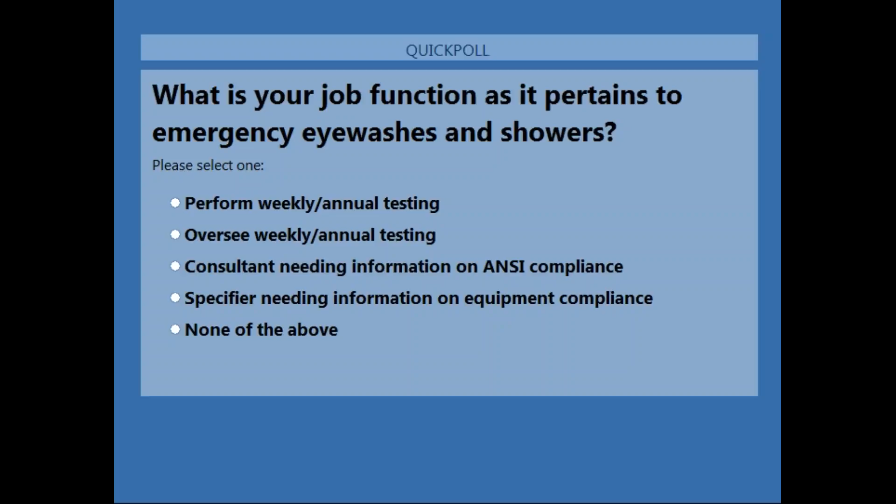Okay, thank you, Samantha. So what we're going to talk about here is the importance of providing the proper equipment. And prevention is what we're going to talk about here. And we always like to start with why. Why do we provide equipment? And when we talk about prevention, it's not really prevention of the accident. Obviously, our equipment is used post-accident.

What we're talking about is the prevention of further injury or even fatality post-accident, overall general workplace risk, lost time, money, both for the individual and the company. OSHA has stepped up enforcement, particularly for employers who have a history of serious or repeated violations. And obviously the goal for Haws and everyone out there, I'm sure, is to go home safe every day.

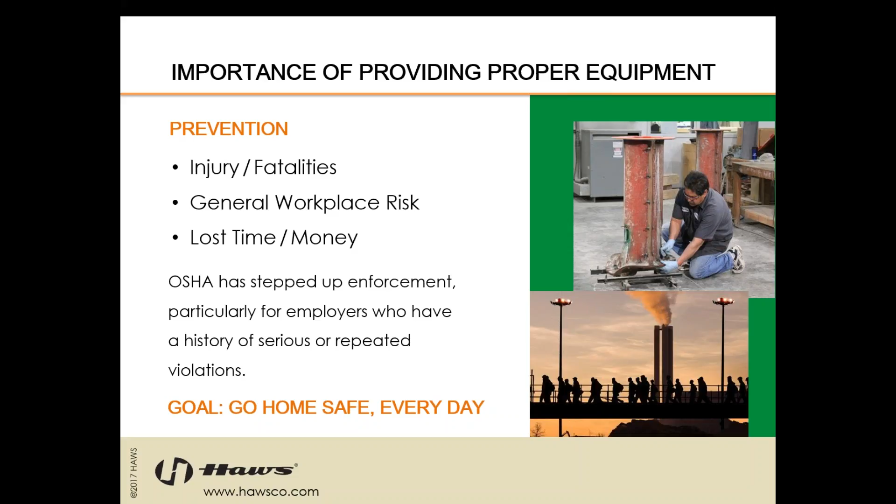OSHA, or the Occupational Safety and Health Administration, states in 29 CFR 1910.151 the requirement that where the eyes or body of any person may be exposed to injurious corrosive materials, suitable facilities for quick drenching or flushing of the eyes and body shall be provided within the work area for immediate emergency use. Now this is the OSHA statement when you look up your requirements for your emergency drench equipment.

In addition to that, some states require emergency eye wash and shower equipment in workplaces where irritants or chemicals are toxic by absorption. And that's stated in the ISEA Emergency Eye Wash and Shower Equipment Selection, Installation, and Use Guide. So it's important that you look at your local requirements by your state.

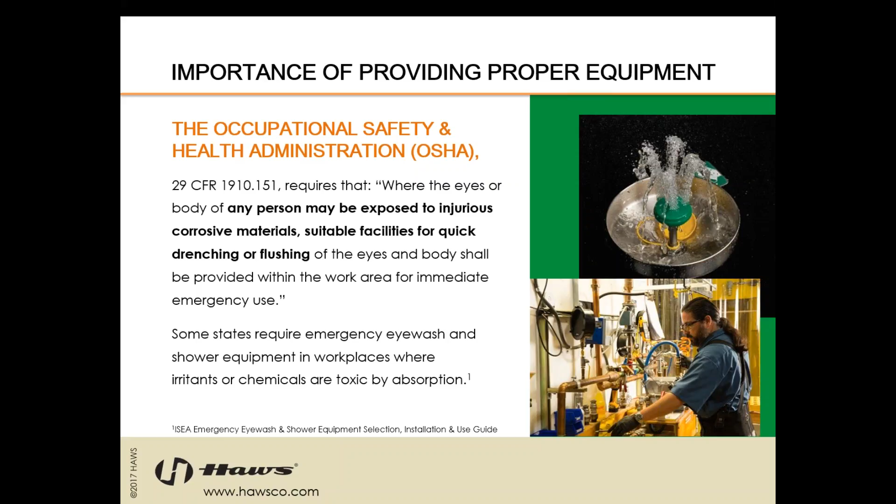So what's really interesting here is, as you can tell, OSHA is very vague as to what defines a suitable facility or corrosive materials. So for definitions and specifics, they recommend following the ANSI standard. Good point. Thank you, Samantha.

The American National Standards Institute, also known as ANSI, has written the standard Z358.1. Actually, the standard was written by the International Safety Equipment Association, the ISEA, which defines the emergency eye wash and shower design, location, and temperature requirements for proper functionality and usage.

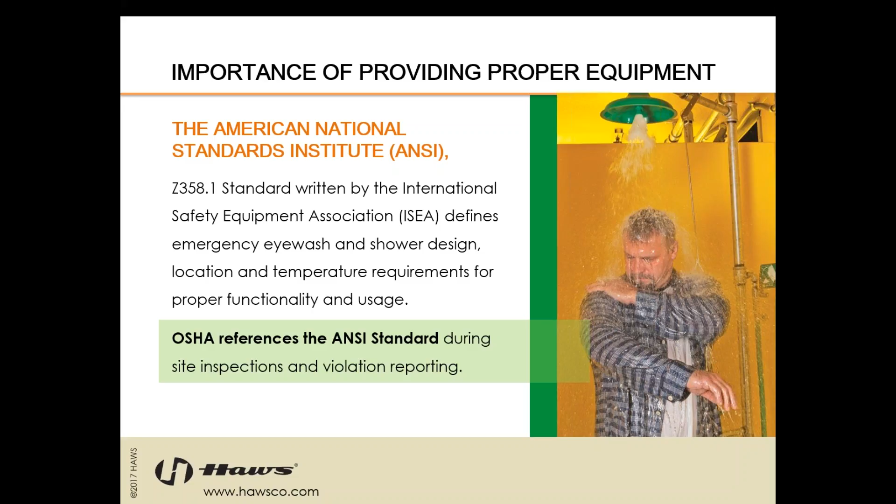OSHA references the ANSI standard during site inspections and violation reporting. So while OSHA is very vague, they do recommend you comply with ANSI to ensure that you're OSHA compliant, as ANSI is the golden standard and the guide in the industry for proper use, installation, location, and testing of your emergency drench equipment.

OSHA fines have increased. Not a lot of people know this, but OSHA fines increased for the first time since 1990 by as much as 80%. This actually went into effect August 1st of last year, 2016. An example of this is a penalty for a willful violation rises from the old fine of $70,000 up to $126,000 now. So very significant fines are in place if you're a willful violator, repeat offender, something you've been flagged for as a warning and failed to correct. Those issues are now being looked at pretty strongly by OSHA with appropriate fines to accompany those citations.

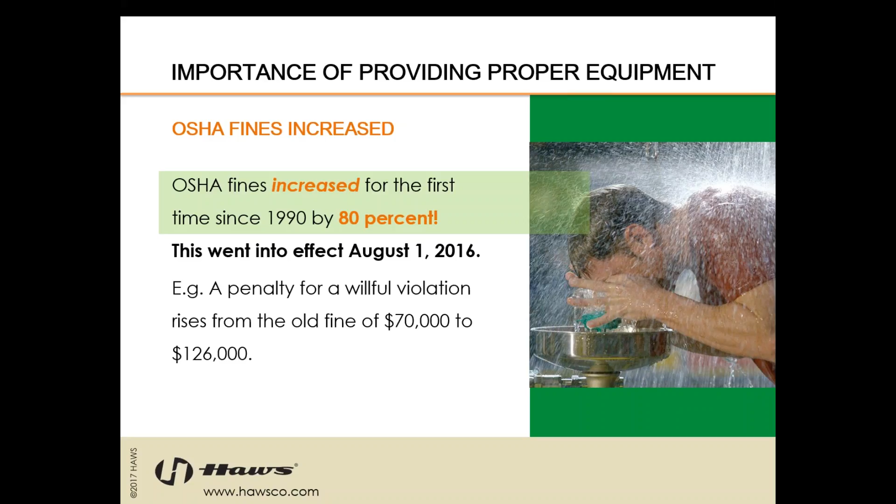A really unique statistic that OSHA published, I believe it was in either 2015 or 2016, I'd have to confirm, but they audited over 39,000 organizations in 1 year, and 17,000 of those were labeled as unexpected visits. So that's kind of interesting and something to keep in mind.

I'm going to launch poll number 2, if everybody could take a moment to answer the question. So before we get into the details of this webinar, were you aware of the weekly testing requirement for emergency showers and eye washes?

All right, thanks everybody. Back to you, Dennis. All right, perfect. Thank you, Samantha.

So we need to discuss actually what is the ANSI ISEA Z358.1 standard. And as we mentioned before, the American National Standard Institute standard was written by the International Safety Equipment Association to define emergency eye wash and shower design, location, temperature requirements, and proper functionality and usage. It was first published in 1981.

Now that's important to note because Congress actually passed the Occupational Safety and Health Act in 1970, in which the full body of OSHA went into effect in 1971. So for the first 10 years, all we had was that very vague definition of what suitable was. ANSI and ISEA got together, they worked on the standard. ISEA wrote the standard and published it in 1981 originally. That was the standard for almost 10 years.

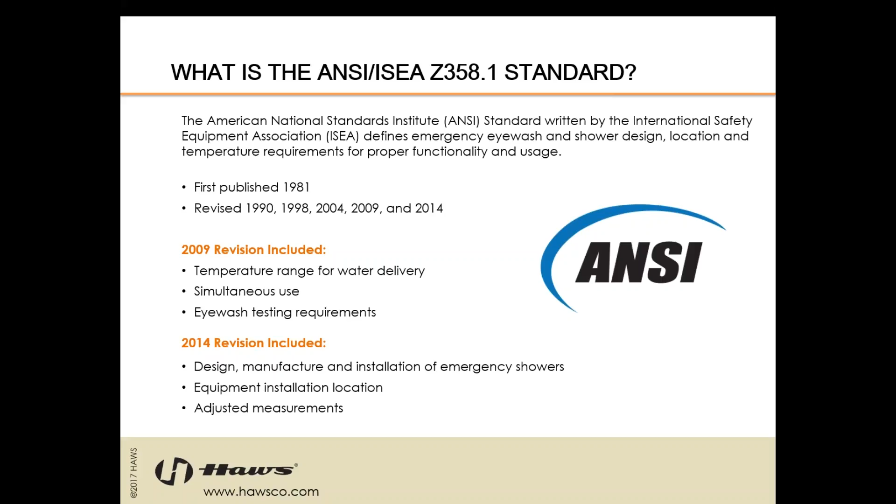Then in 2014, these revisions included some design, manufacture, and installation requirements, more for the manufacturer side of what we're required to make sure that the equipment that we're providing is, and then the installation of which, of course, is up to the owner. Equipment installation location was also further refined and set forth in 2014, and then there were a few adjusted measurements, which we'll get into here in a second. So in 2014, it was very minor revisions, mostly on the manufacturer side versus on the end user side. Correct. Perfect. Thank you.

Okay, so significant requirements and how to test for compliance. This is really what everyone's here for today. So let's start to outline a few of these. Now what we've done is we've kind of set these in order. It's very broad and ranging. The ANSI standard's well over 30 pages. So we've tried to narrow this down into sections that make sense. It may seem a little jumbled all over the place, but what we tried to do is put it forth in a clean manner for you.

So in short, one of the significant requirements of Z358.1 is that all emergency showers and eye face wash equipment shall be inspected annually to ensure conformance with all applicable requirements of the standard. And that's set forth in a few different sections.

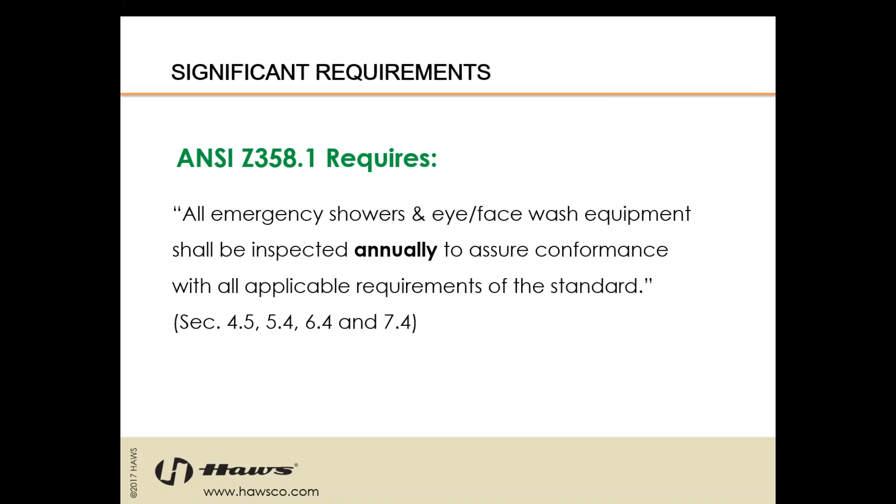So let's get into the meat and potatoes of this. I just want to give a little background first.

Real quick, the way we're going to go through this is we're going to try to hit on all of the requirements that don't require activation of the unit. Typically when you're out in the field testing for the annual inspection, you're going to want to check the installation, do the measurements, assure alignment, and all this we'll get into detail on prior to having to turn on the water. Otherwise you're going to have a big mess everywhere. So we'll start with all the non-water requirements, and then we'll get into all the requirements after activation.

That being said, the first thing we want to look at is installation of eyewash and face wash equipment. This is a measurement requirement, so unfortunately this one does require activation, but the further ones will not. The first thing we want to look at is making sure the equipment is arranged such that the flushing fluid flow pattern is not less than 33 inches and no greater than 53 inches from the floor.

It was previously 45 inches in the 2009 standard. What this means is not where your spray nozzles or head is, but where the flushing fluid flow pattern meets the points on an eyewash gauge, which we'll look at closely later on how to properly use a gauge and measure that.

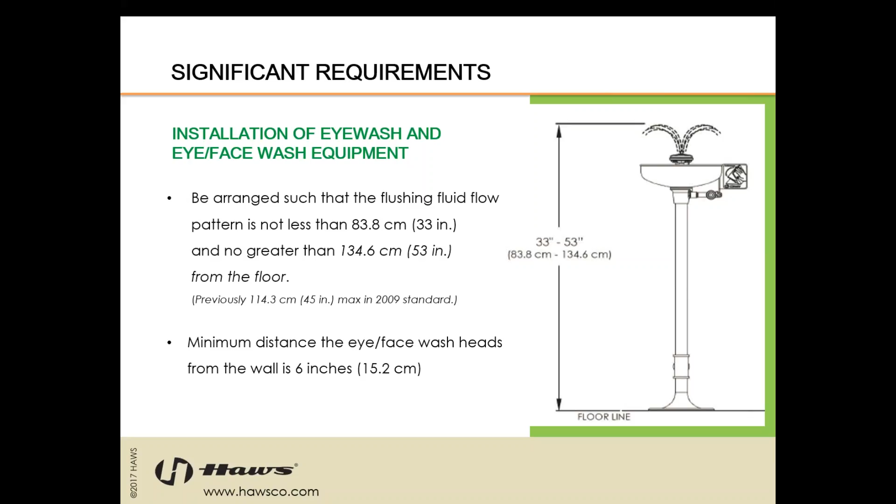How do we test this? It's pretty simple. We use a measuring tape, check the point where the eyewash flow meets the eye circles on an eyewash gauge, then measure from there to the surface on which the user stands. We'll get into exactly how to use an eyewash gauge properly in a second.

Once again, minimum distance from the eye/face wash heads is 6 inches, and once again a simple tape measure check on that. Once these are installed, most are permanent installations, so it's fairly easy to know that once it's installed correctly, you're going to probably meet this year after year.

But it's important to note it's not the height of the bowl, not the height of the head or nozzles - it's the flow pattern, which can change over time due to corrosion in pipes, dirty water, plugged heads, things of that nature can restrict your flow eventually, giving you varying flow levels. Even though the equipment is mounted exactly where you want it, flow heights can change over time due to various circumstances, so that's important to keep note of.

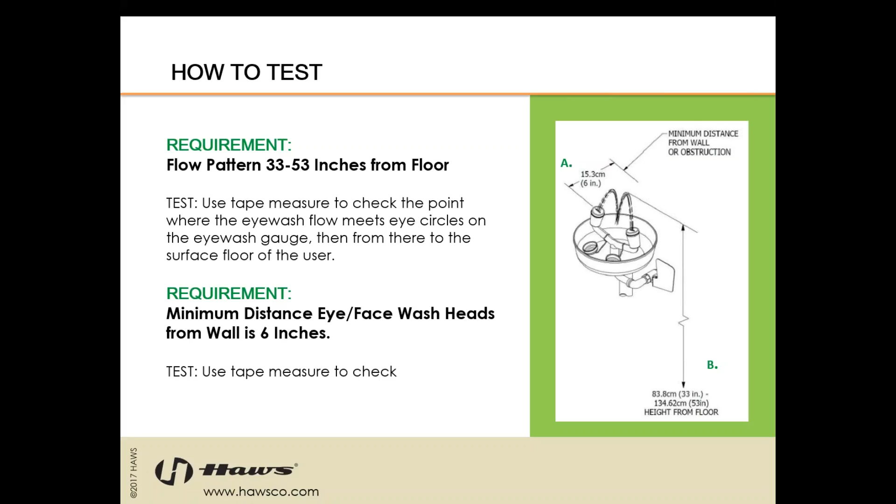Showers and combination units: the shower head must be 82 inches minimum, 96 inches maximum above the floor or the surface on which the user stands. The actuator, also called the pull rod, must be no more than 69 inches from the surface on which the user stands. We want to make sure people of all heights can reach the pull rod to activate it.

And the height of the shower head is very important because of flushing fluid flow patterns, which we'll get into in a second. Significant deviations in your shower head height change the flow pattern of the shower itself, so it's really important. Most manufacturers design their equipment to operate fully to the standard between 82 and 96 inches.

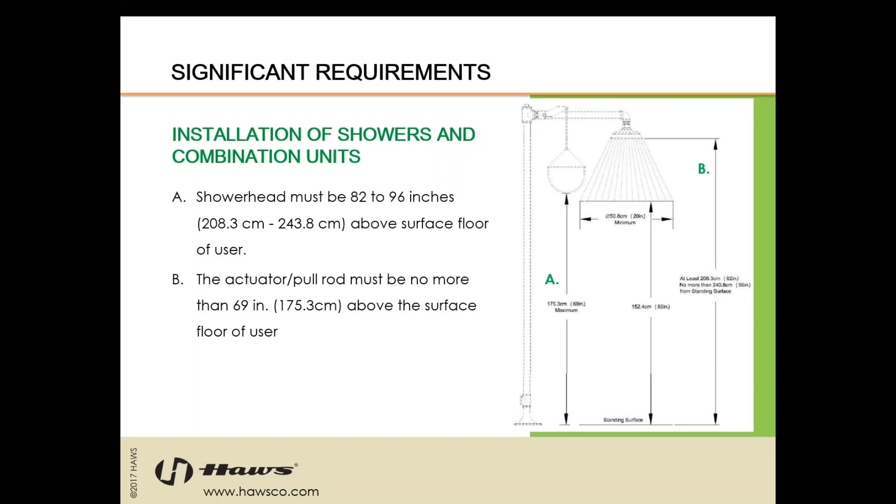Once again, very simple test - just use a tape measure, check it. It's a permanent piece of equipment, generally not moved around, so once it's installed correctly you can usually be sure from year to year that height hasn't changed. Obviously there are accidents - forklifts banging into it, things of that nature can knock things out of alignment. So once a year, put a tape measure to it just to make sure you're still within your height requirements.

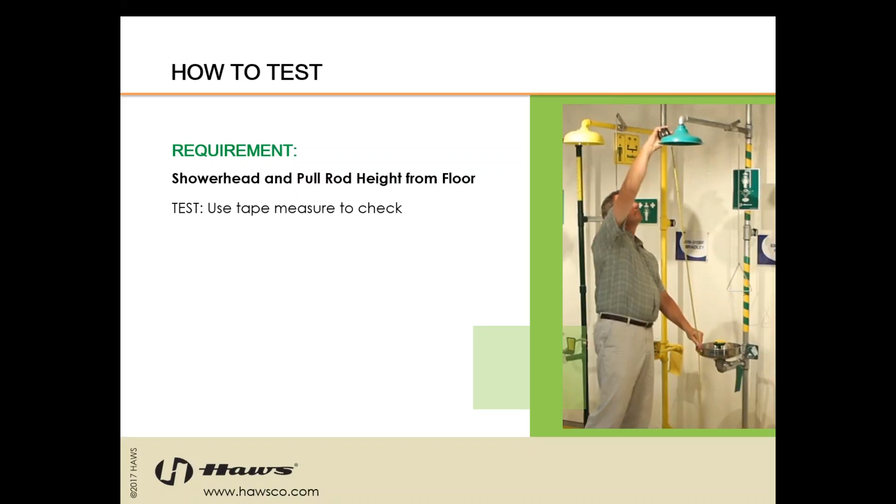Simultaneous use is an important one, and this is something we commonly see in the field during inspections. We want to check that the eyewash and shower are aligned for simultaneous use by the same person. As you can see on the picture on the right, the eyewash bowl is several inches to the left of the actual shower head. This would not be compliant.

We want to make sure that when a body exposure happens, the victim can comfortably and easily use the eyewash while the shower is activated over their head, rinsing the rest of their body. On the picture on the left, you can see complete alignment between the bowl and the shower head, which leads to simultaneous use. Very important, and a common thing we see out in the field as a miss.

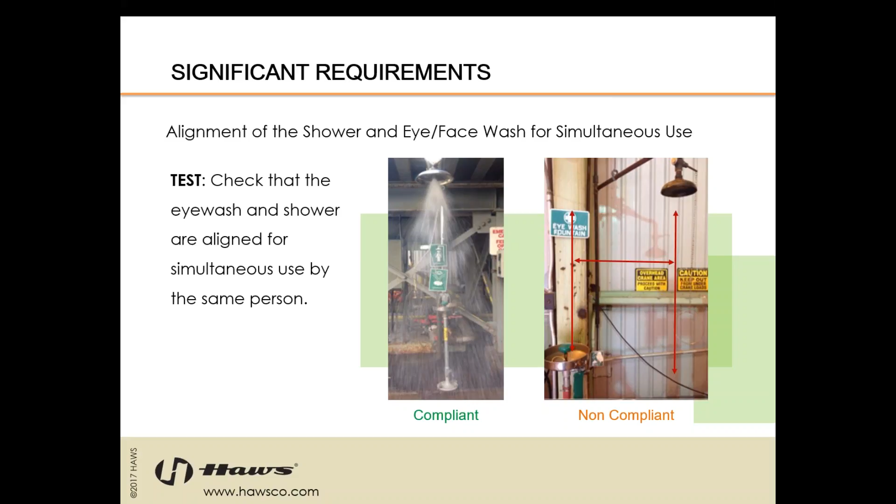All nozzles, outlets, or even stored flushing fluid must be protected against airborne contaminants. We want to ensure dust caps and covers are the correct fit and are in place. This is really important. These can fill up with debris. You can see on the right there's a fairly dirty plant of some sort. The eyewash nozzles are not protected.

This leads to a couple of issues. The first is your flow could be restricted greatly by contaminants or any particulate matter filling up the eyewash nozzles. In addition, once the water starts spraying out, those irritants and things that have collected in there are now being introduced into the eye, at least for that first initial push. So it's very important that your dust covers are in place. It ensures perfect performance and also prevents any further injury to the victim trying to use that piece of equipment. As you can see, the product on the left has a dust cover securely in place, and on the right, just open portholes, which are obviously not going to be compliant.

So Dennis, I believe I was reading a violation citation from OSHA, and something as simple as the dust caps not being in place was a $500 fine. It may not sound that bad, but times as many units as you may have, and then that gives OSHA the option to come back into your facility and check again for repeat violations. So it's very important to make sure you're following the standard, even all the way down to a dust cover.

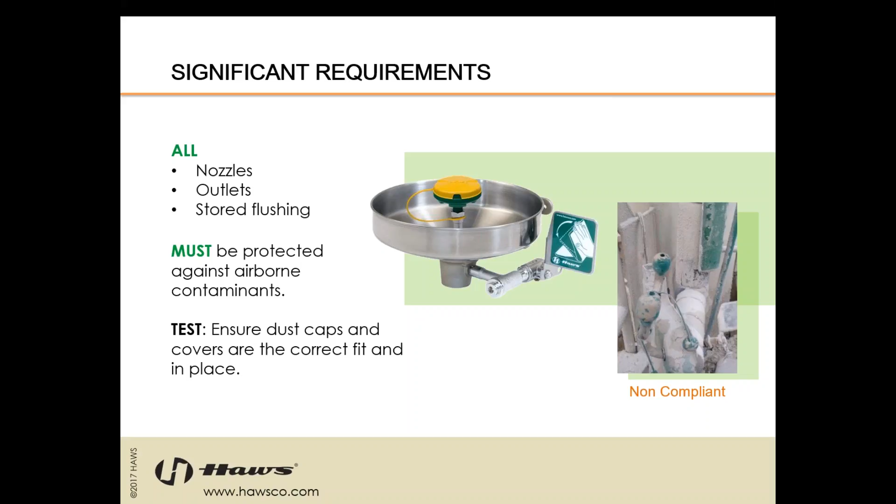Absolutely, and that's a great point because this is just a few dollar piece. It's a very simple piece to obtain and acquire, and for a few bucks you can make sure you're not opening up Pandora's box to OSHA. Once they're in there for one violation, they can begin to check everything from your emergency drench equipment to your fire extinguishers, whatever else it is that they need to check. So you really want to make sure you're compliant in all areas.

This is another important one. All emergency eyewashes, eye face washes, showers, and combo units must be accessible within 10 seconds from the hazard, must be located on the same level as the hazard, and the path of travel must be free of obstructions. There is one small consideration to this when we're talking about being located on the same level as the hazard. In the 2014 revision in Appendix B, Installation Considerations, they have now allowed a single step into an enclosure where the equipment can be accessed, which is now not considered to be an obstruction.

This is to allow for what we see on the picture here, emergency booths that are located outside, generally in cold weather or extreme weather environments. These are usually skid mounted, so there's usually a small lip, less than 4 or 5 inches, into the enclosure. That being said, a berm is considered an enclosure.

If you had to walk up a stair or two to reach the equipment from where your hazard is located, that would be considered an obstruction, and no longer on the same level as the hazard. We have to remember the victim is most likely in a state of duress. Many times they cannot see. We don't want to further their injuries by having them navigate a difficult path, navigate stairs, go up different levels, or go down from a level.

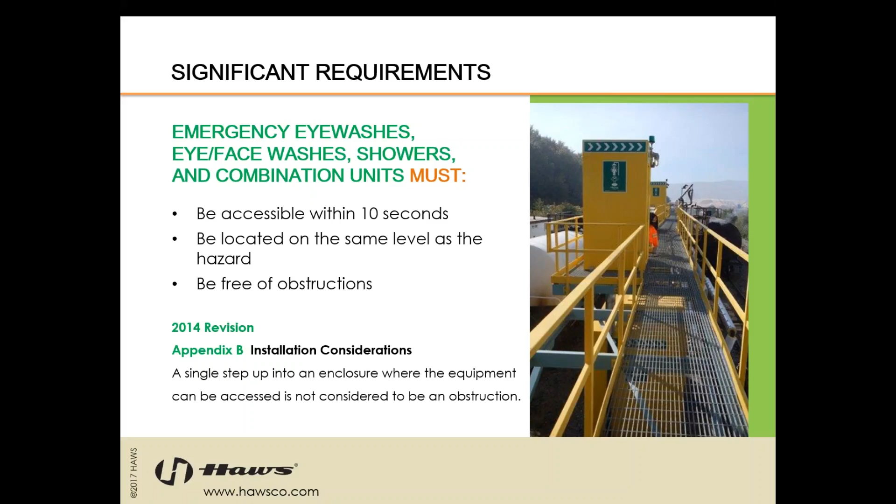So how do we test this? Really, you need to check for the proximity of the hazard, like I mentioned before. We would like to see it as close as possible. As I mentioned, 10 seconds walking pace is a fair measurement. We want to make sure it's located on the same level as the hazard. Confirm the equipment is on the level as the potential hazard, no stairs, different floor like we mentioned.

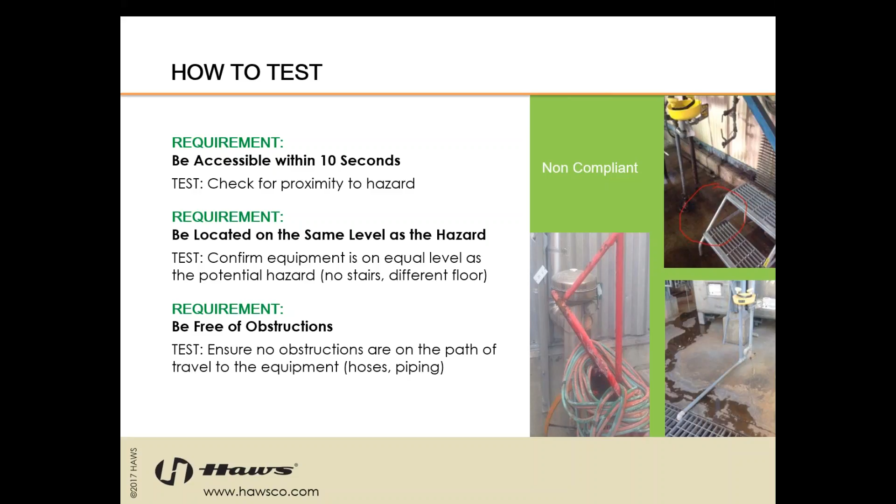Emergency eye washes, eye face wash showers, and combo units must be well lit and identified with highly visible signage. Deliver flushing fluid for a full 15 minutes, and the actuator shall be simple to operate and go from off to on in 1 second or less, and remain on without the use of the operator's hands.

This is really important. It can't be a self-closing valve. Once the actuator is open, it needs to stay open. That way the victim can use their hands to keep their eyelids open while in an eye face wash, or remove potentially contaminated clothing. These things are all important. You don't want to be relying on one of your hands to work the equipment. You have to have the use of both hands.

On that point of going from off to on in 1 second or less, a lot of people will come to us at a trade show or contact us and say, well, isn't it one motion? That's something that has never been in the standard since its inception in 1981. It is absolutely a misnomer that's out there in the industry. I'm not sure if it came from another manufacturer, but it has spread itself around. There is no requirement or anything in the standard that says the unit needs to be activated in one motion.

For example, manufacturers have faucet-mounted eye washes that require the activation of the water and the twist or the activation of the eye wash, which, as you know, is a two-motion activation. That is compliant as long as the equipment has been certified by CSA to the ANSI standard that it can go from off to on in 1 second or less. Great point, Samantha. That is a very common misconception out there. One motion, for some reason, is in the mind of many people, but it has never been in the standard, as Samantha mentioned.

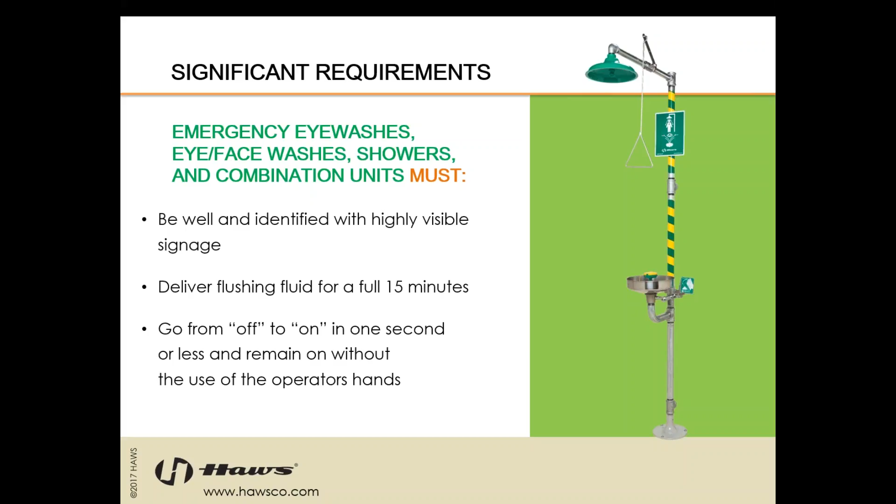So how do we test for these? Well lit, this is a difficult one. There is not actually a lumens or light measurement requirement. Basically, it just says well lit, so that's really up to you to make sure your equipment is well lit. Easily identifiable with highly visible signage. Proper signage, adequate lighting, very important.

Your people need to know where to go for this equipment, and once again, if they're in duress, they need to be able to locate the equipment easily. And the signage is provided typically from your manufacturers. Absolutely, when you purchase a new unit, it will always come with a sign, at least from Haws for sure.

Deliver flushing fluid for a full 15 minutes. Annually, it is required to run each piece of equipment for a full 15 minutes and monitor flow. This presents a lot of problems. We understand that.

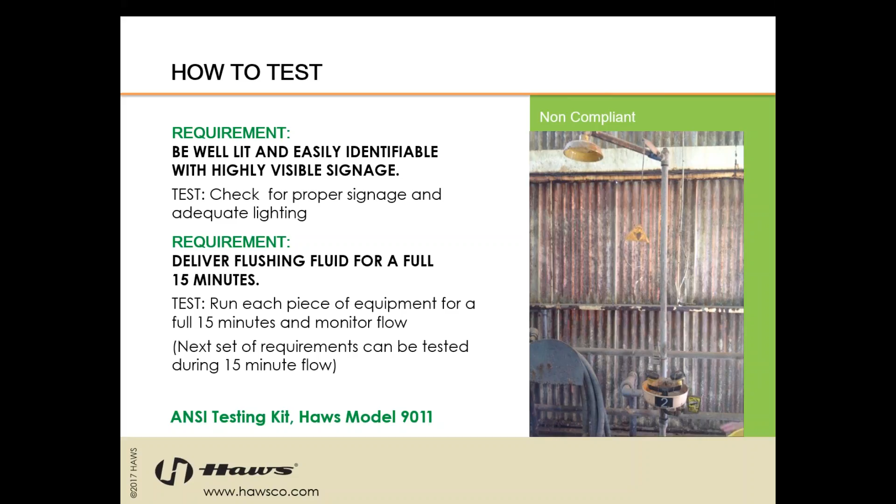But it is what it is. The standard requires this. There are companies working on providing ways to collect this water, whether it's big portable tanks, but when we're talking a 15-minute run for a shower at 20 gallons a minute, that's 300 gallons of water that needs to be collected somehow if there's no drain available. It's a big issue out there. I can tell you Haws is actually looking at a couple of things to help with this.

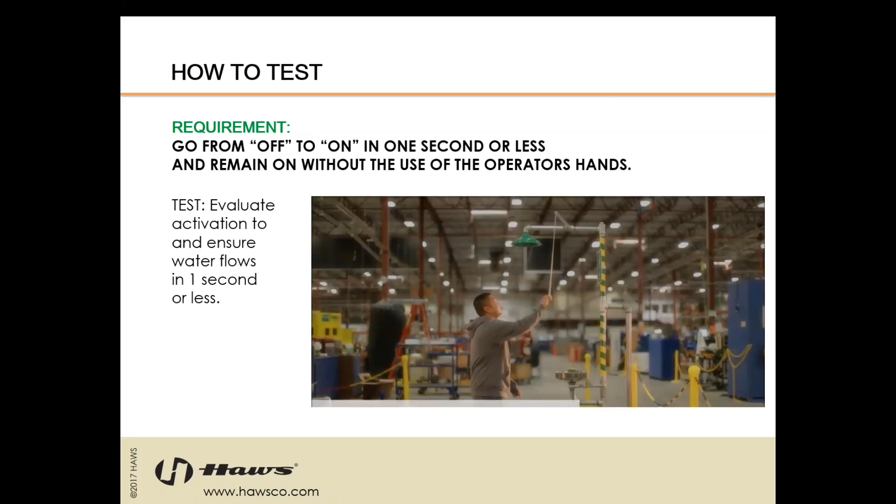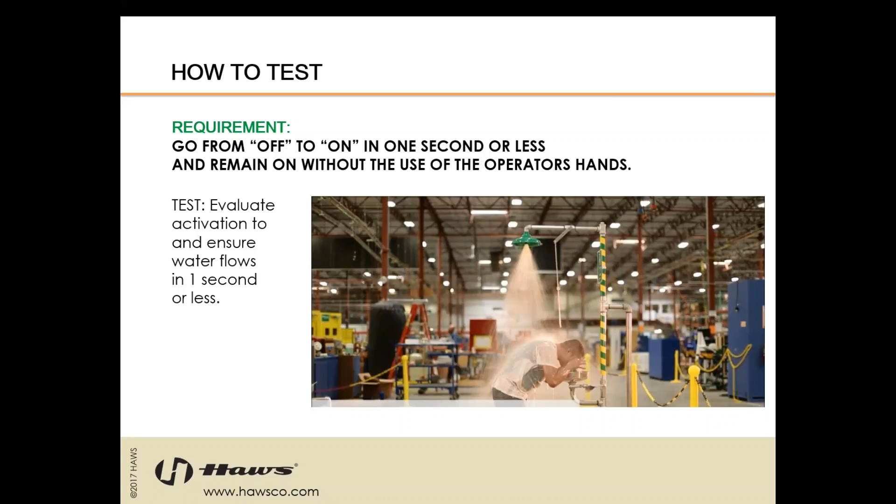Go from off to on in 1 second or less, remain on without the use of the operator's hands. Simple test: evaluate your activation device. Ensure the water flows in 1 second or less. When you push or pull your rod, push your eye face wash, water must be available instantly, immediately. As you can see, the gentleman here is using the equipment. No hands required. Stay-open valves. Easy test.

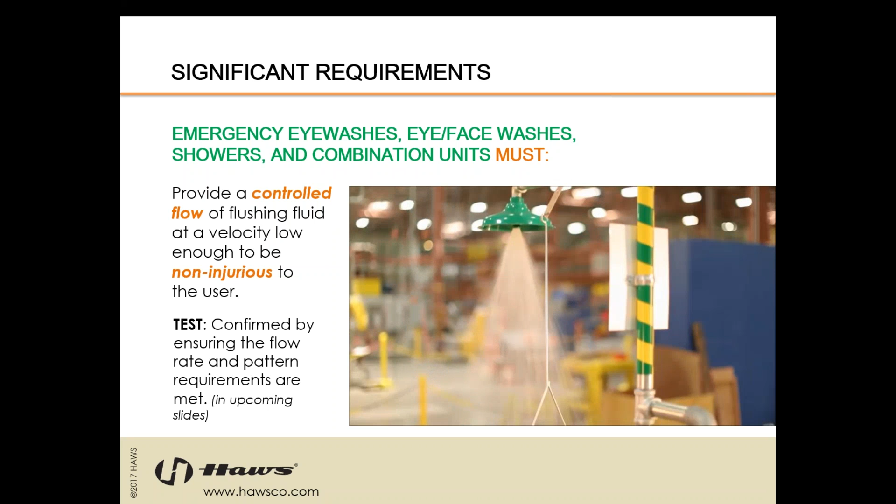Emergency eye washes, eye face washes, showers, and combo units must provide a controlled flow of flushing fluid at a velocity low enough to be non-injurious to the user. That's really important verbiage here, at a velocity low enough to be non-injurious. Your equipment may meet all the minimum requirements, and as I don't believe I mentioned before, all requirements set forth by ANSI are minimum requirements, not maximum flow requirements, minimum only.

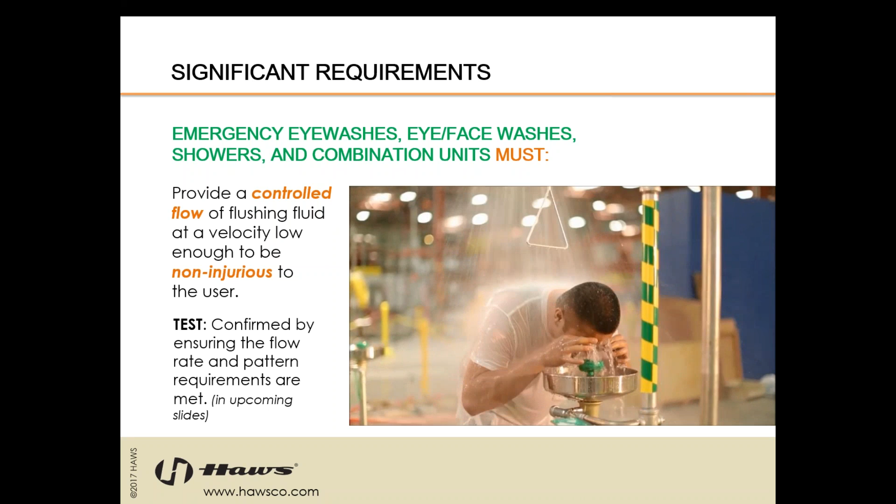Flow controls can help with the non-injurious verbiage of this. We can see a piece of equipment that will meet the minimum flow requirement, but the flow will be very aggressive, maybe at times 2 or 3 feet. You've probably seen this in your own facilities at times, 2 or 3 feet above the eye wash bowl, you can see water shooting out. Well, of course, it meets the minimum requirement, but the non-injurious to the user requirement is something really important to be considered. No one wants to stick their eyeballs in an eye wash that's really aggressive for a full 15 minutes. It won't lead to a comfortable use, and the victim's likely not to stay for a full 15 minutes.

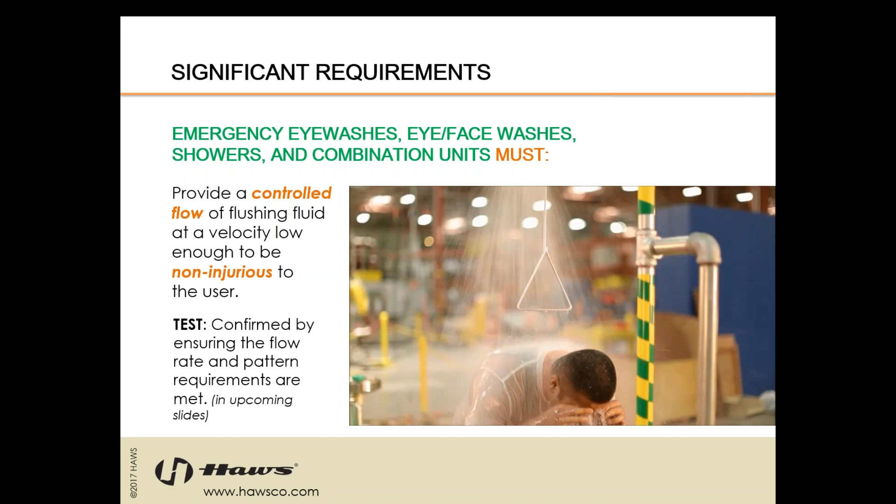We can confirm controlled flow of flushing fluid. You can confirm that that requirement is met with your eye wash gauge.

As you could see in the previous slide, that combination shower and eye wash is providing, and we'll get into the flow rates, but just for reference, it's providing a total of about 23 gallons per minute at 30 psi. So that's about 10 times the flow rate of your shower at home. Take that into consideration.

On the manufacturer's end, it's really important to provide a soft flow and even distribution to promote the 15-minute drench time, and take victim comfort into consideration. Exactly, victim comfort is very important. It's often overlooked, but when someone is in a distressed state, they want to make sure that they are getting their full flush. It's very difficult to do with really aggressive spray patterns, really aggressive water. It's hard on the skin, it can be hard on the eyes. So a soft flow, a nice smooth laminar flow is really important.

The flushing fluid shall cover the areas between the interior and exterior of a gauge at some point less than 8 inches above the eye wash nozzle. This is really important. What we want to make sure here is that the eye wash gauge, a measurement set forth by ANSI, is basically the average distance between the ocular sockets of the average person. So your flow patterns must meet the points of that gauge. The water flow pattern has to be hitting those eye wash sockets at 8 inches or less above the nozzle. Really, really important—this is a common miss in the field. People say, I've got my minimum flow rates, but as I mentioned before, there can be several 3 or 4 feet of spray coming out, and your eye wash pattern might not actually meet that requirement of some point less than 8 inches from the nozzle.

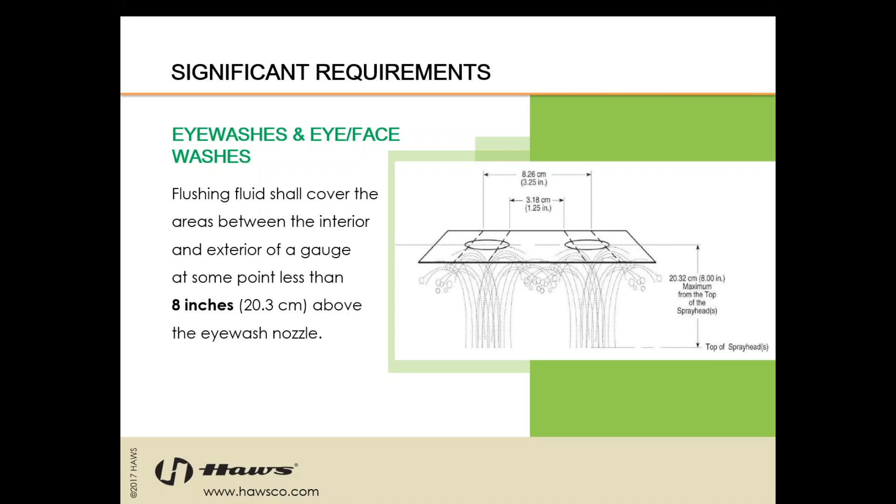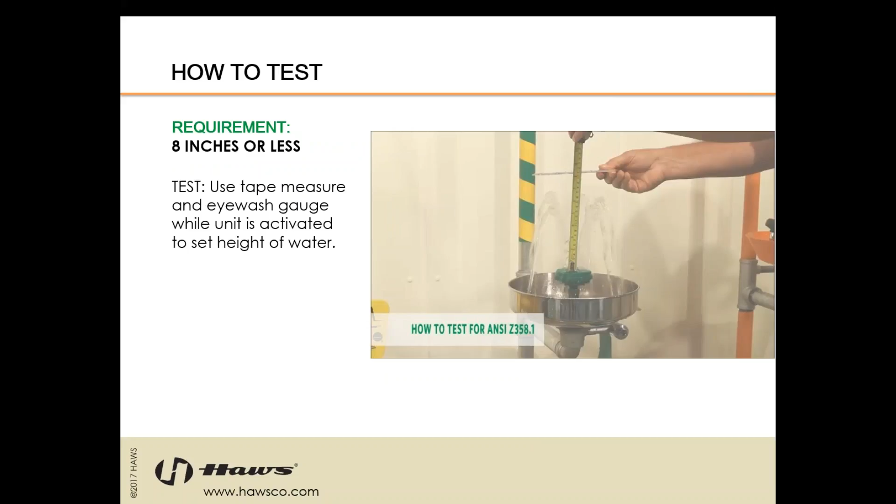Really easy to measure. You just use your tape measure along with an eye wash gauge while the unit is activated to make sure your height requirements are being met. That's, once again, not where the top of your water ends, but where they meet the points on that eye wash gauge.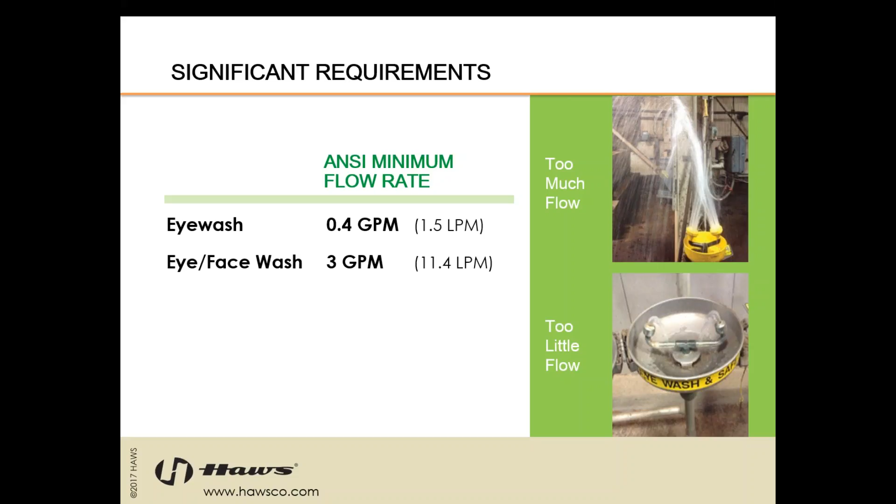The minimum flow rates for an eye wash only are 0.4 GPM, gallons per minute. An eye face wash, which is a very different piece of equipment, is 3 gallons per minute. Generally, the way to tell the difference is most single port or single opening flushing heads are eye wash only. The top one here could be considered an eye face wash. It has multiple sprays and is probably going to get a larger volume of water to your face. It looks like they're for sure meeting the 3 GPM. I would challenge that one possibly, though, isn't meeting the gauge at the proper height of 8 inches or less.

Flow rates. This is a difficult one to measure in an eye or eye face wash, much easier to do in a shower with some simple equipment. It's simply really hard to collect the water. As you can see, most of the time these are over a bowl, and the bowl then goes into a drain pipe and is disposed of. That makes it difficult to actually measure your true flow rate. You can put a flow meter on your feed line, but that's really just your supply, not measuring the true flow from the heads. As I mentioned before, there could be restrictions from debris in the head, dirty filters, inline strainers, or bad flow controls, and that can all lead to restrictions from the actual output of the head.

So what we like to do for this one, to make sure you're meeting your flow rate, is once again use the eyewash gauge. We make some assumptions, and this can be tested at the same time as your 8-inches-or-less confirmation. Simply place the eyewash gauge while the unit is activated and ensure the water hits the eyewash circles on the gauge at some point less than 8 inches. Most manufacturers, I know Haws for sure, do all of our testing in-house. We know that when we put out a piece of equipment, we're easily meeting the 3 GPM standard on our eye face washes. So if your water is hitting the gauge, you can assume you're probably hitting your minimum flow requirement. Once again, those are minimum requirements, not maximum.

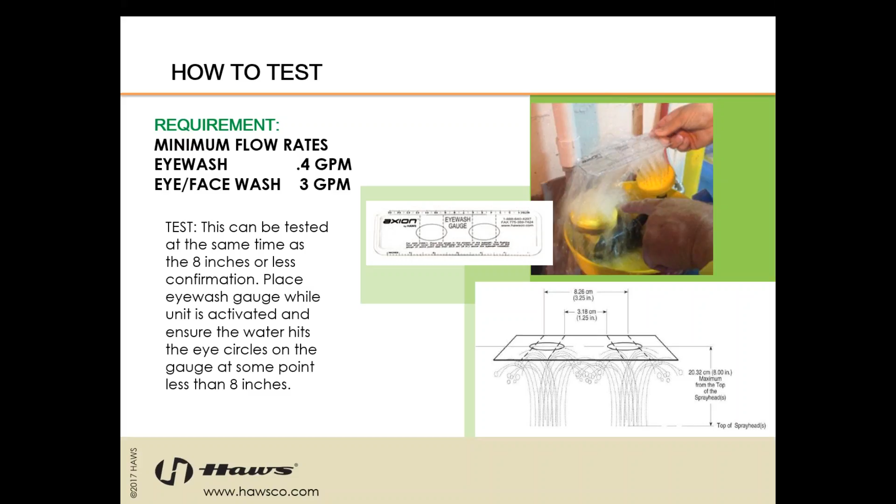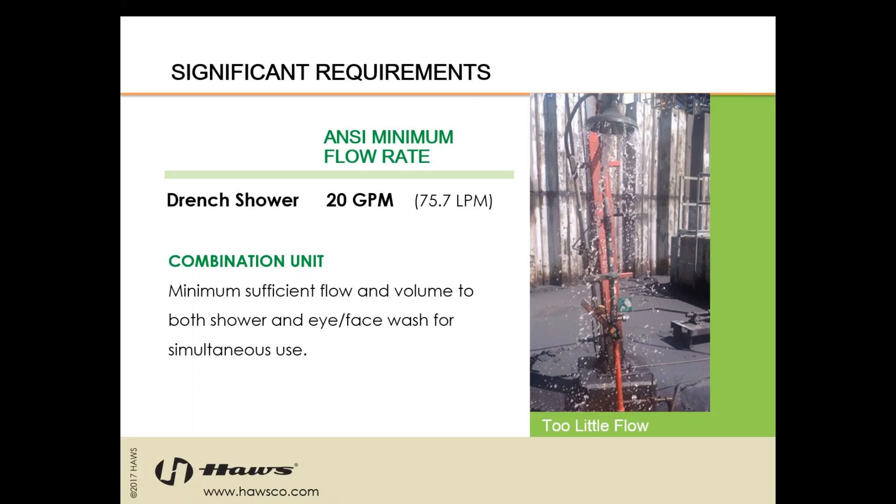So how do we test this? Well, this is how Haws tests flow rates for the shower head. You need a few basic pieces of equipment: a 5-gallon bucket with a 2-gallon water line marked somewhere on the bucket, what we call a shower sock with a pole on it so you can put the shower sock up around the head, and then a thermometer. We like to test a few things at once, so if you get your thermometer involved here as well, it's a great way to tick off a few things on your testing.

Place your thermometer in the bucket—we like a pool thermometer, a little waterproof thermometer—and place the shower sock around the shower head and into the bucket.

Activate your shower for 6 seconds. You want to check that the 2-gallon water level mark on the bucket is met. 6 seconds of flow equals 2 gallons of water. That translates to 20 GPM.

So instead of running for a full minute and then trying to figure out what to do with 20 gallons of water, you can run that for 6 seconds, have someone count for you, make sure your 2-gallon water is marked, and then you know you're meeting your 20 GPM requirement. At the same time, you can use that thermometer and get your temperature measurements. So it's a great way to kill a couple birds with one stone there.

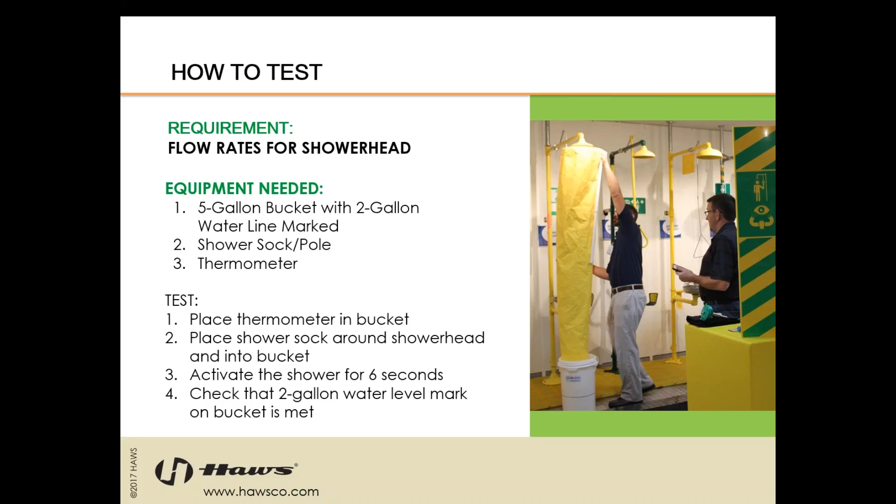Shower head water distribution, also known as flow pattern, must provide a column of water 20 inches wide at 60 inches above the surface on which the user stands. Flow pattern is important. This ensures that your whole body is going to get covered. As you can see on the left, great flow pattern, nice wide distribution of the water. On the right, not the same flow pattern. Obviously, there are many issues with that one, but the flow pattern obviously is not being met here.

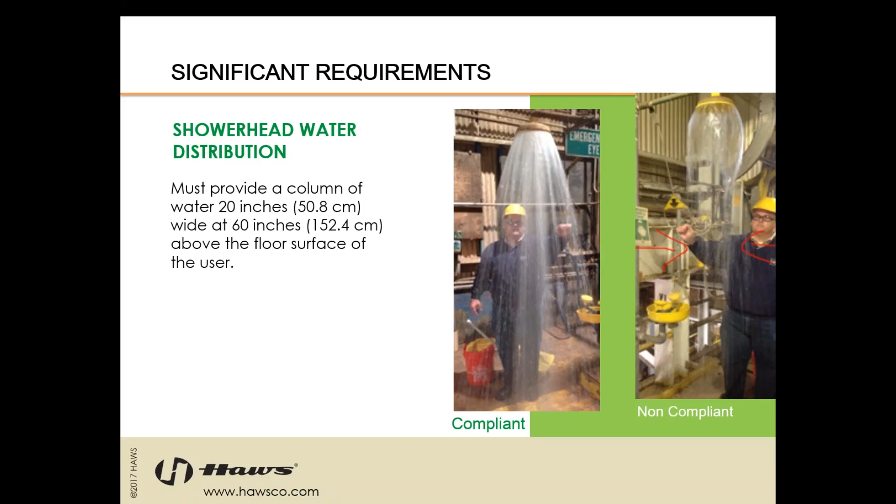Once again, a really simple one to measure. Use a tape measure when it's activated to confirm compliance. All you need is 20 inches at 60 inches. It's fairly simple. You only have to have the shower running for a second or two. Turn it on real quick. Make sure you've got your 20-inch wide.

Most manufacturers meet this one fairly easily as long as your shower head is installed at the correct height, as we mentioned earlier. Significant deviations of the shower head height, particularly too low, can lead to improper flow pattern. So when it's too low, you can see the way the cone of water comes down. You're not going to meet your 20 inches at 60 inches requirement if the shower head is too low.

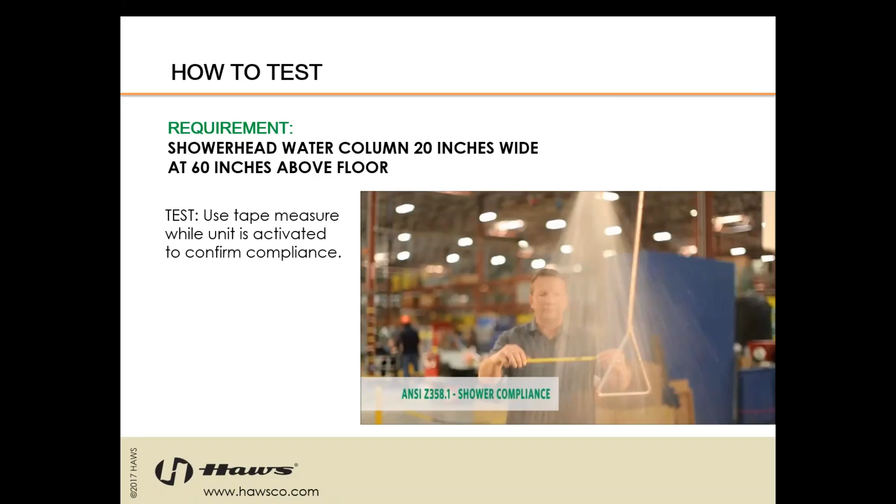Combination unit meets minimum flow and volume when both activated for simultaneous use. Simultaneous use is huge. This is probably the single biggest issue we see in the field when we do our on-site inspections. The shower might work great by itself. The eye face wash might work great by itself when they're the only things isolated working. Once you turn on the shower, what we call starvation can occur very commonly.

What we want to make sure is when you activate both the eye wash and the shower head together, you're getting your flow at the same time with no starvation. Many times without flow controls, the eye face wash heads are starved of water. The 20 GPM is rushing to the shower head and you're losing your flow from your eye face wash. This is critical. This has got to be met.

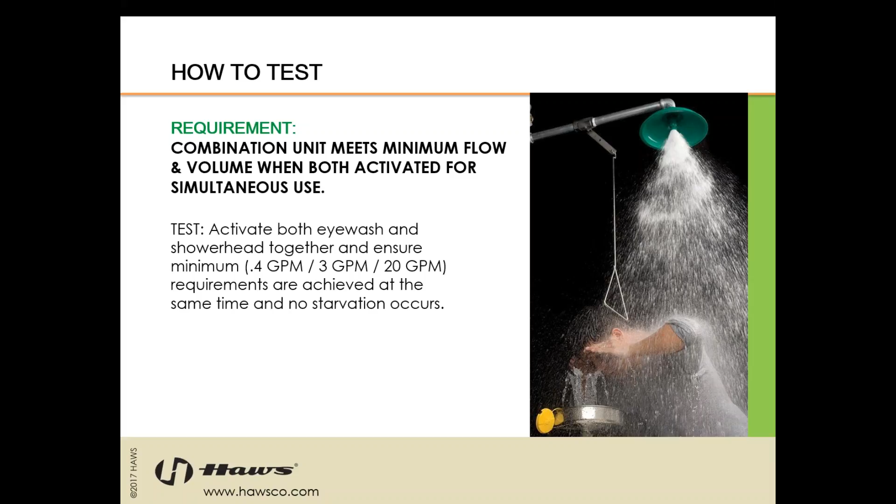Emergency eye washes, eye face washes, showers, and combo units must deliver tepid flushing fluid, which, as we let you know earlier, is now defined as a minimum of 60 degrees Fahrenheit up to 100 degrees Fahrenheit. That's 16 to 38 C for our friends up north. 75% of ophthalmologists say that having tempered water is very important, citing it increases the chance that a victim can tolerate the 15-minute flush required. Particularly important for the full body flush.

Anything below 60 for more than 15 minutes can lead to hypothermia, particularly if you're in an outdoor situation. Let's say Minnesota in the dead of December, you're not going to want to stand there in 60 degree water for extended time. I would say you couldn't take it for more than a minute, much less a full 15-minute cycle. Very important you have tempered water coming to the victim. Victim comfort is very, very often overlooked. Victim comfort, though, is the #1 thing that leads to a full 15-minute proper drench cycle, as most SDS sheets require.

Now, consult with your SDS sheets. Many require a 20-minute or even longer, but the least that we found is 15 minutes. ANSI requirements are set at that 15-minute baseline, so you want to ensure that what you're working with is covered here. A couple key points on that.

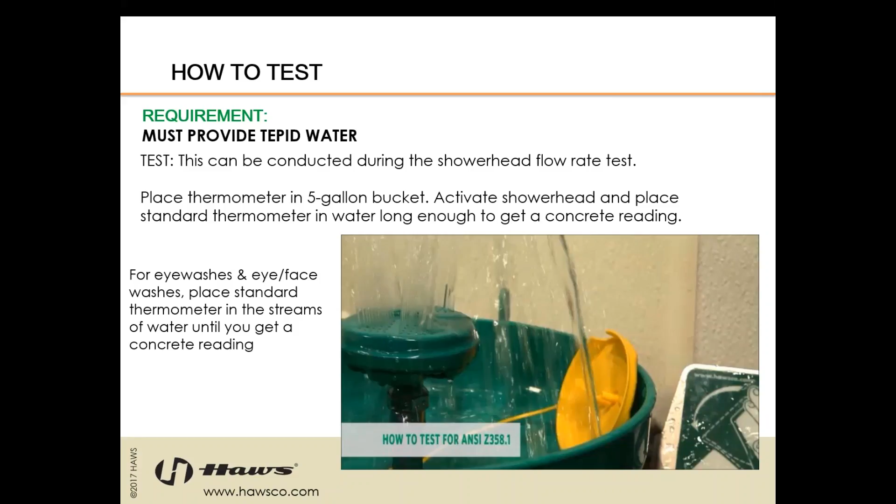If it's an eyewash only, go ahead and just leave it in the flow of the eyewash for a few seconds, or however long it takes, till you feel like you're getting a great reading. For eyewash and eye/face washes, just put it in the stream until you can get that great reading.

All right, Samantha, another poll question. Sorry about that. Thanks, everybody. So the next question on your screen, we'd like to know, are weekly inspections currently being conducted on your equipment? We're about to get into what the requirements are for the weekly test versus the annual test. I'm getting a lot of questions there, so we'll clarify that in the next couple slides. But if you could take a moment to answer this poll question, it would be appreciated. All right, thanks everybody. Back to you, Dennis.

Okay, portable and self-contained equipment. This is a little bit of a different beast. Many of these you do not want to activate weekly because you don't want to get rid of your drenching fluid that you've got in there. Many times it's protected with a bacteriostatic preservative of some sort. Some of the other manufacturers out there use a bladder system where it's a self-contained saline solution in a contained bladder that you only need to change every year or two or even longer, and you don't want to puncture that bladder and cause an activation.

So the determination by ANSI is these must be visually checked weekly. You want to make sure the flushing fluid is still present and that it doesn't need to be changed or supplemented. In other words, you haven't lost any due to evaporation, and there hasn't been an activation where someone maybe didn't notify the powers that be that order and check this equipment.

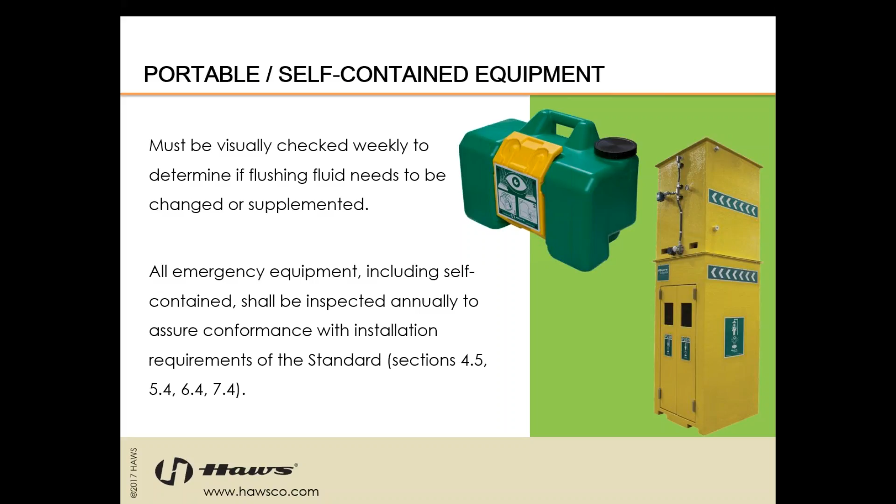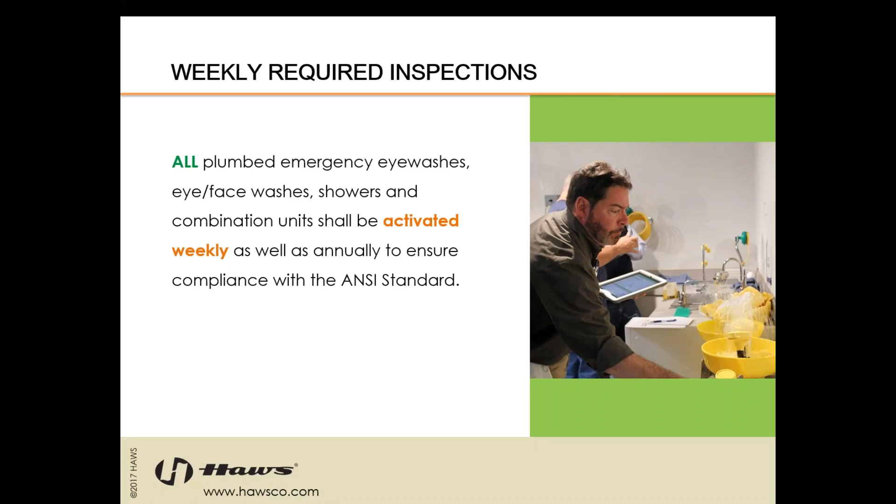Weekly required inspections continued. All plumbed emergency eyewashes, eye/face washes, showers, and combo units shall be activated weekly as well as annually to ensure compliance with ANSI. Weekly activation is really, really important. We want to make sure that the water is actually available, that there hasn't been a shut-off valve somewhere down the line that someone forgot to turn back on.

We see this happen in schools, believe it or not, in school labs frequently. Water is shut off by the maintenance staff for the summer. Students come back in the fall. No one remembered to turn the line back on. There's an incident and there's no water to the emergency equipment. It can happen a lot during maintenance, plant shutdowns, whatever it may be. Really important to make sure that you're doing your weekly activations to make sure that there's water still available to the device. That ensures the flow of the water to the heads of the device.

The duration of the activation, this is kind of a difficult one. The verbiage is, it shall be sufficient to ensure all stagnant water is flushed from the unit itself and clears all dead leg sections of the piping. Stagnant water begins to grow bacteria. It just is what it is. Water in the dead legs can begin to grow bacteria in as quick as a week. That's why the weekly activation was set up.

A lot of people refer to this as the bump test. They kind of turn it on for a second, make sure the water's coming out, and then they turn it off. Well, it's got water to it, it's fine. Technically, it's not. You want to follow your dead leg back to the main flowing, recirculating line. Make sure you have cleared that dead leg appropriately. There can be bacterial growth in there, and the last thing we want to do is introduce bacteria into a victim, into their eyes or to their skin.

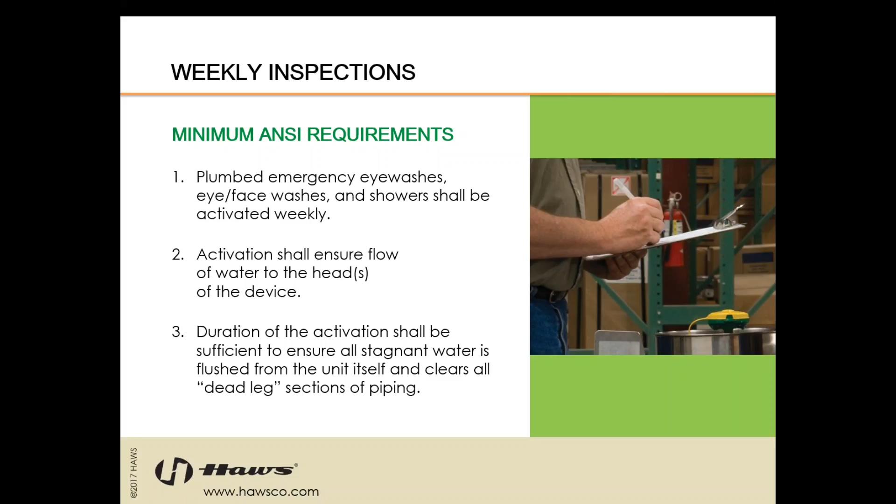Some best practices. Additional weekly checks are recommended to fully ensure the equipment is functioning correctly and is capable of providing proper first aid. Testing procedures should follow the previously explained testing that we talked about, but also weekly what we recommend you do is check a few other things. Your access. Make sure the path of travel is free of obstructions. This is really a key. We see this a lot.

Pallets are temporarily put somewhere and then they're not moved, and the next thing you know, that temporary pallet that someone dropped in front of the eyewash station becomes a permanent pallet because that's just where it belongs now. Well, that's not where it belongs. It belongs somewhere else, free of obstructing the eyewash or the shower. Your delivery of tepid flushing fluid.

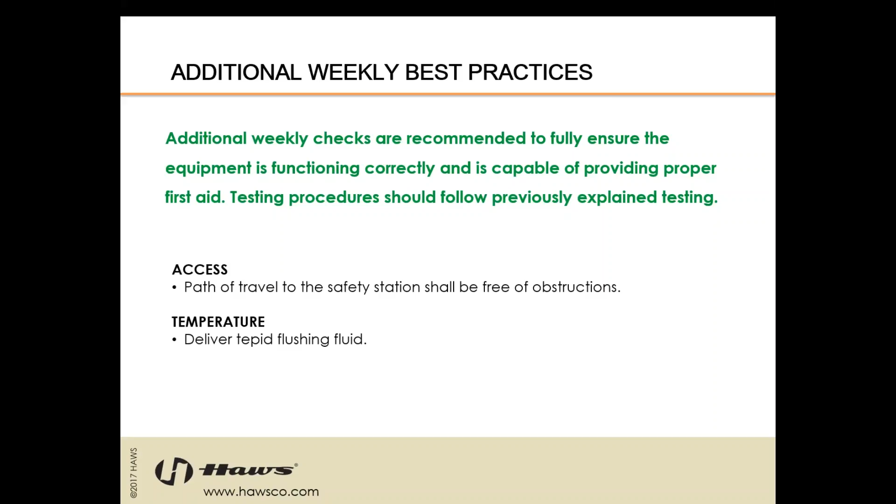Once again, really important to check that weekly. Just throw a thermometer in it. There can be failures, there can be any number of things that can lead to your tepid water no longer being tepid. Some other best practices: make sure your outlets are protected from airborne contaminants, so your dust covers are in place.

Really important. This one can change over time, like I mentioned, because of unclean water, hard water, a lot of sediment in the water can start to clog over time - your piping, your inline strainers, possibly filtration that you have on your water lines. So your flow pattern can change over time. Just because it's good one week does not mean it's good the next week. Things happen and things can get lodged in the heads. Really important.

Controlled flow to both eyes simultaneously at a velocity low enough to be non-injurious. I can't stress this one enough. This is really important. Just because you have that minimum flow does not mean you're not blowing out the eyeballs of the victim. It's got to be a nice, low, smooth velocity, non-injurious to the user, that encourages them to remain in the eyewash. If it's uncomfortable, or it could actually even be dangerous, there's too much pressure on the eyes, you just want to make sure that it's a nice, smooth, comfortable flow for your victim.

Shower, deliver that minimum of 20 GPM. Once again, easy to do with a 6-second test with your bucket and a sock. Valve off to on in 1 second or less, just like the eye face wash. Flushing fluid should remain on without the use of the hands. Combination unit, capable of operating simultaneously. Make sure there's no starvation occurring - when you activate your shower, your eye face wash still remains robust, meeting those minimum flow requirements.

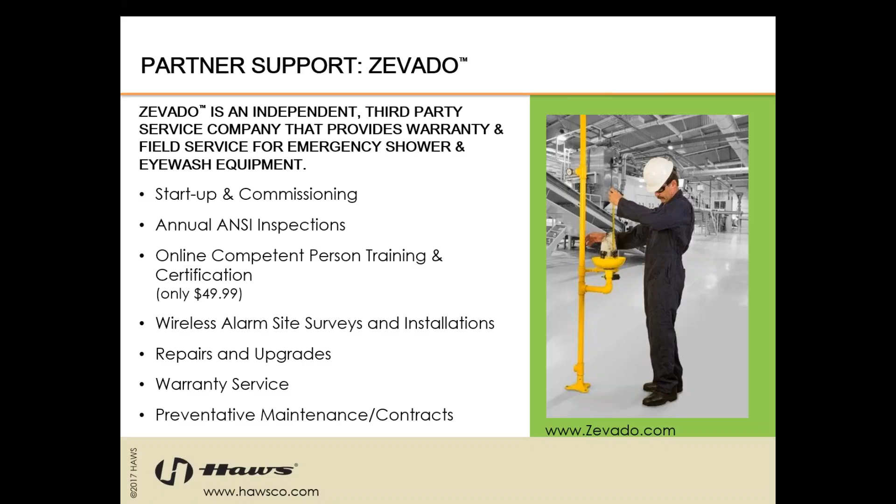They can be found at www.zevado.com.

All right, I'm going to go over some quick resources, and I really want to get to some of the Q&A. We are going to provide you in the follow-up email our weekly and annual inspection checklist. It's one piece combined, but anything required on a weekly basis is noted with a W. There's also access on our YouTube page to an ANSI Z358 standard webinar that's very similar to this, but gets a little more detail into the requirements. This webinar was more about how to actually conduct the test.

We have a risk-rated response tool on our website that'll help you select the correct equipment based on the level of corrosive materials, the level of coverage you need, etc. We have our ANSI white paper best practices that will also be in the follow-up email going out today.

Earlier, Dennis mentioned we have an ANSI testing kit. A lot of questions came in wondering if we have that kit. Yes, it is model 9011. It includes the gauge, the thermometer, the bucket, the shower sock, the rod, etc.

We talked about the site surveys, and then we have a full page on our website, hawsco.com, that gives you a plethora of information on the ANSI standard.

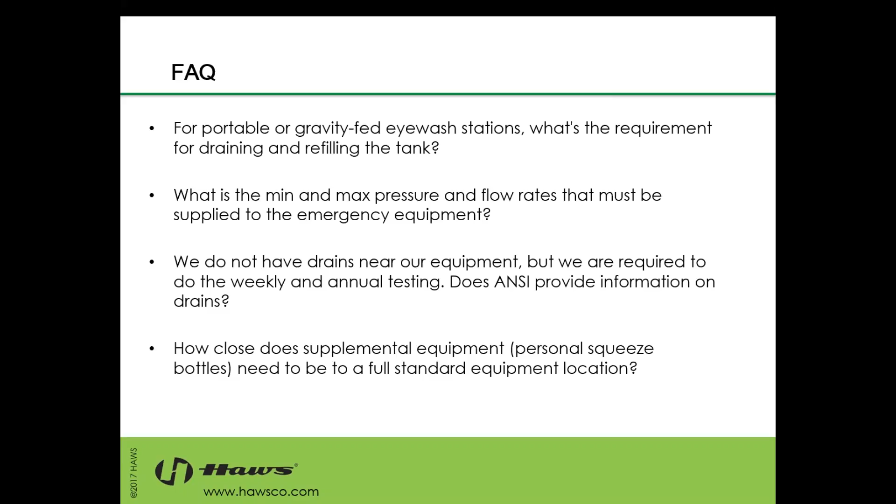Someone asked, do you recommend that your equipment and signage follow ANSI Z535.1, the standard for color coding? Yes, we do recommend that, although it's not required. You'll see other manufacturers use different colors. Red typically equals danger, yellow equals caution, orange equals warning, and green equals safety equipment. All Haws equipment is green for that recognition factor.

Another question from Joshua: can dust covers be improvised with things like lab plasticware, or do they need to be the manufacturer's? The ANSI standard has no requirement here, it just says the outlets need to be covered. We obviously recommend sticking with the manufacturer's covers, and we have replacements if those break, since we've manufactured them to fit properly. When the unit is activated, the cover needs to flip off without the operator removing it, so you'd need to be very careful if creating your own.

Another Josh was wondering if there's a grandfather clause, so if equipment meets previous year's standards and there was a recent update in 2014, does it need to meet the 2014 standard? Absolutely, there's no grandfather clause in place. If a new standard comes out, all existing field equipment must adhere to it, regardless of whether it met previous standards. Once the new standard is out, that's the new law of the land.